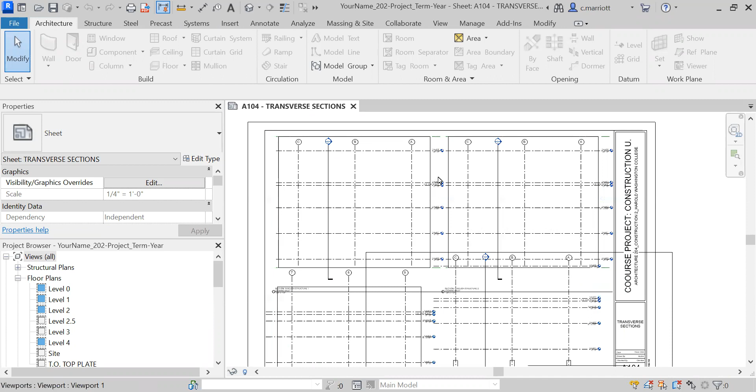So for this process, we're going to be working back and forth between the details and this sheet. There's some things you can do to make things more orderly. I'll be turning off some of these detailed datums, cropping some of the views, and making some alignments between the details.

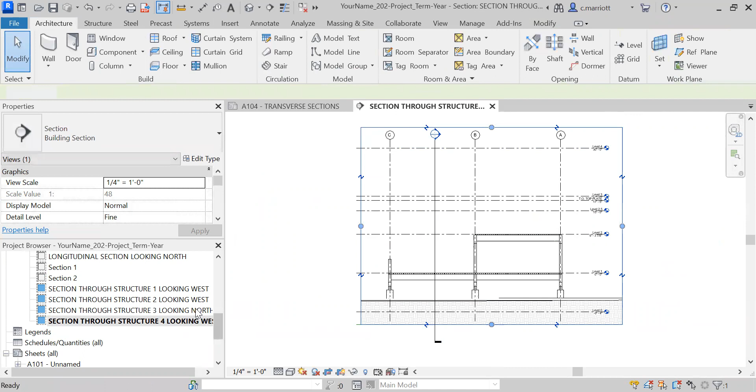The first thing I want to focus on is this section detail in the lower right, for section 4. I'm going to go to that view. As you can see, the crop window is quite large here, and I don't need to show this much content, so I'm going to pull these in just so they don't overlap so much with the other drawings. And I'll go back to the transverse section drawing.

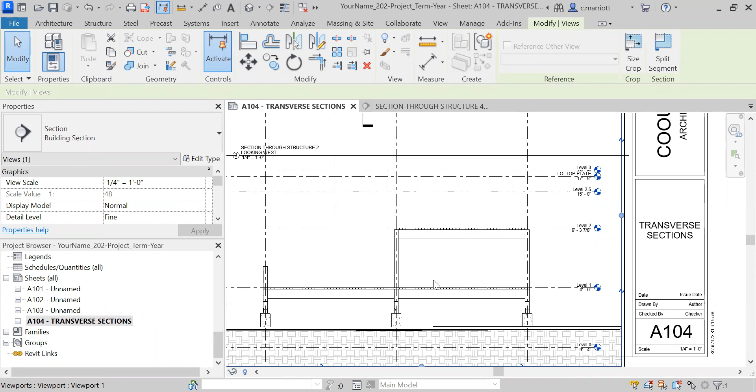Okay, so we still have a number of things we can do. For one thing, these datums don't really have relevance to this particular detail, since we have only a one-story structure. So I can begin to pull this in a little bit. I'll go back to structure 4, and I will pull this detail in, maybe just below level 2.5.

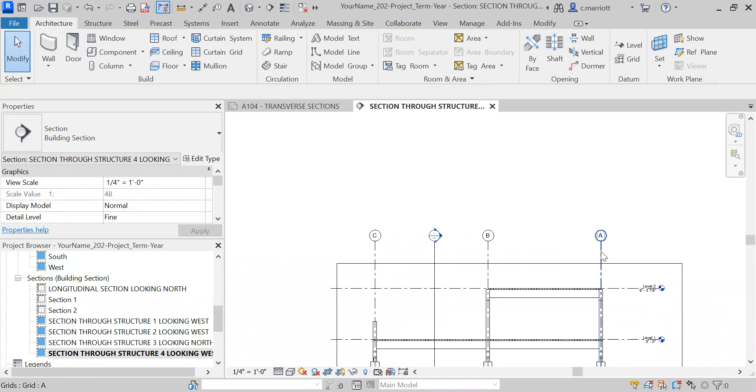I can click on these column bubbles and pull them in even a little more. I want to leave a little space on top for notes and other call-out bubbles, but generally I can condense this one quite a bit, and pull this in a little more on this side as well. All right, let's go back.

You'll find you have to go back and forth between the sheet and the details until you get things fitting a little bit better.

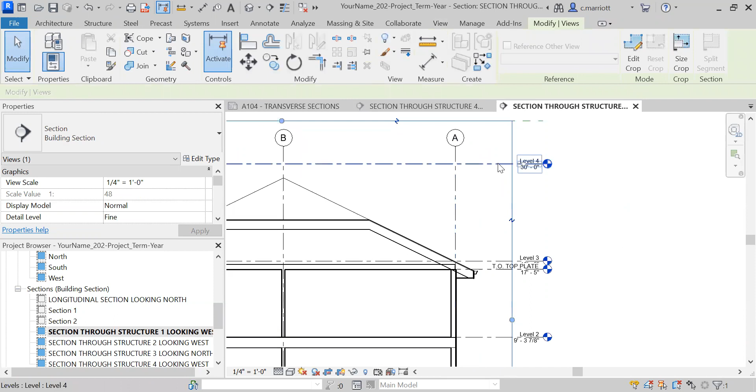Now I'm also going to go to the section through structure 1. One thing I don't need for this section is this datum to appear, so I'm going to hide this element in my view. And this one right here, level number 3, isn't really relevant, so I'll do the same thing.

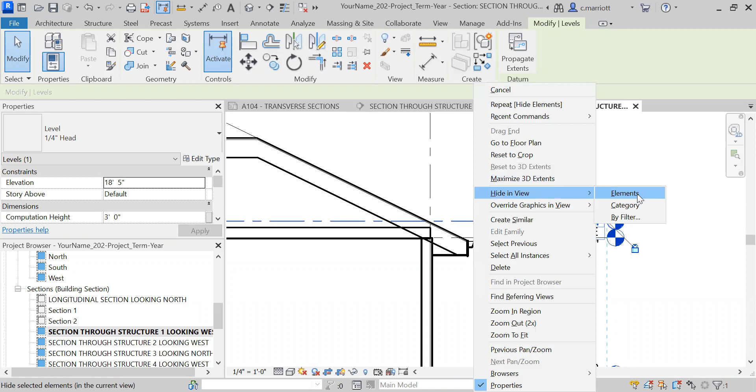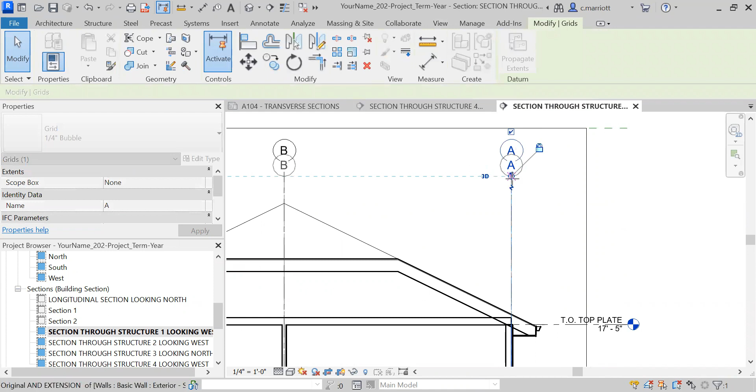Hide in view elements. I do want the top plate, level 2, level 1, and level 0. I might rename those at some point, but for the time being I want to keep those. I can also pull this down a little bit. I'd suggest you leave a little space at the top of the ridge.

And you can also take your section target here and pull that down. We want to roughly center it between these column bubbles in terms of height, so the center line of that circle. Okay, now let's go back to the sheet.

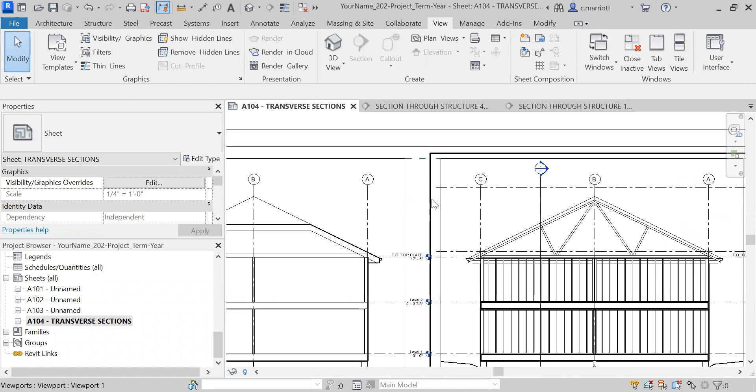This is going to allow us to move this up a little bit. I'll do the same thing with this view, which is the section through structure 2. Hide in view, same thing with this level 3. And again, these datums can remain.

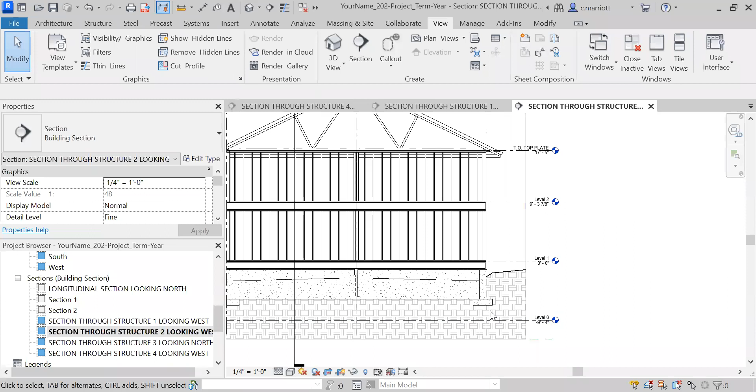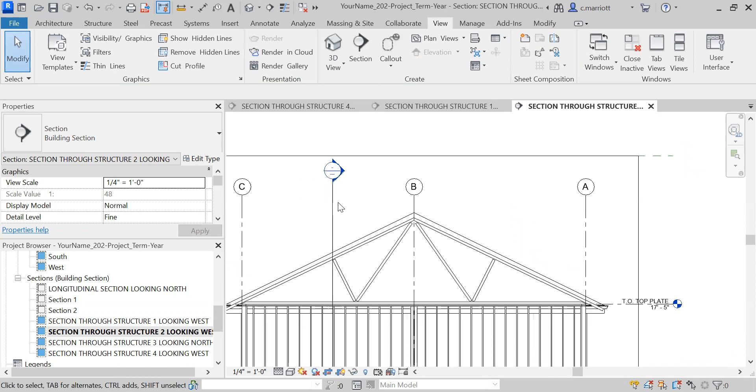This one here is a reference to structure 1, and we will probably need to add another datum for the crawl space to show maybe the top of footing, as a reference for someone who was to build the project. So this one is probably about the same height as on my other drawing. For the section target, I can pull that down a little bit. Let's take a look at how those relate to one another.

I still have my crop window showing, which may also be causing some visual clutter, but eventually that will be turned off. One thing I'll start to do, at least with these two sections, is make use of the datum since it's running across and serving the same reference. I'm going to try to make alignments across the page, so I'll only need the ones over here on the right.

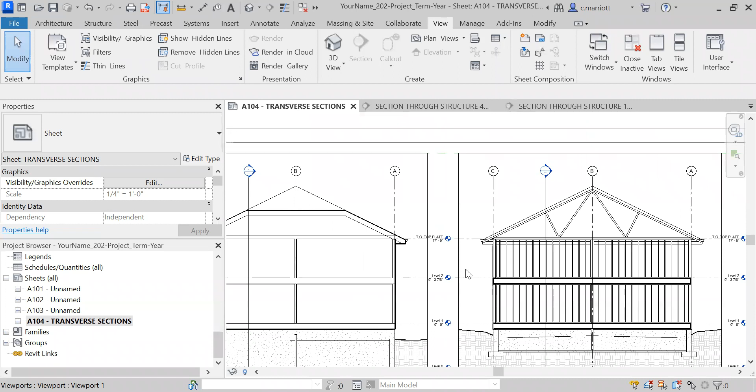Another thing I can see is that some of the details from the other structures are appearing in the view, and it's causing some confusion. So for this particular section, I don't have a gutter in the fascia.

So I can go to my longitudinal section looking north, click on these, and basically you can see it's showing this much within the view. I don't need to show that. I'm going to pull these in so they're inside the perimeter wall here.

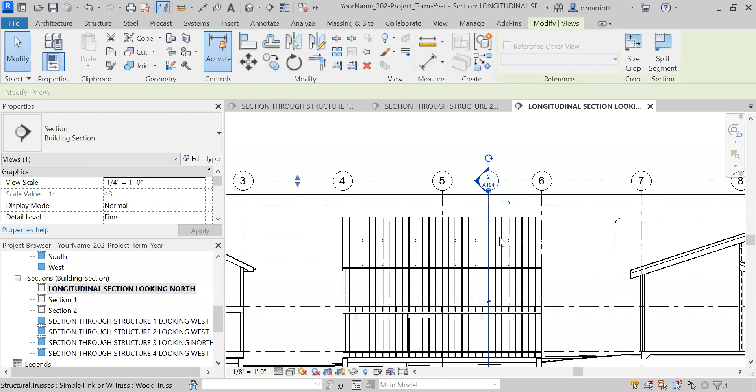Sometimes you'll want to include the information in the perimeter wall within a section, but other times it just makes it confusing. You can't really tell what is in the near foreground and what's further back. So I'm going to pull these all in.

This one here, it's kind of clipped to the center line, and I want to get a little bit more in that view. So I'm going to pull that one back.

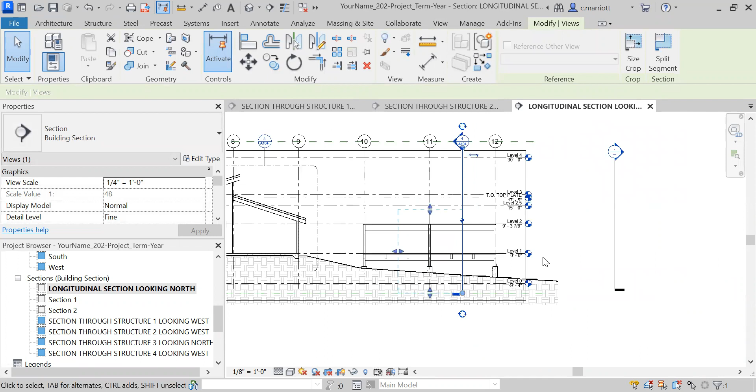So the section marker is the full height, like I had drawn before, but in the view, I pulled this down, and that's why this cropping window is much shorter.

Right now, if I go back to the section sheet, you can see now I'm not seeing some of that detail. So it will help me when I start to add notes and things like that.

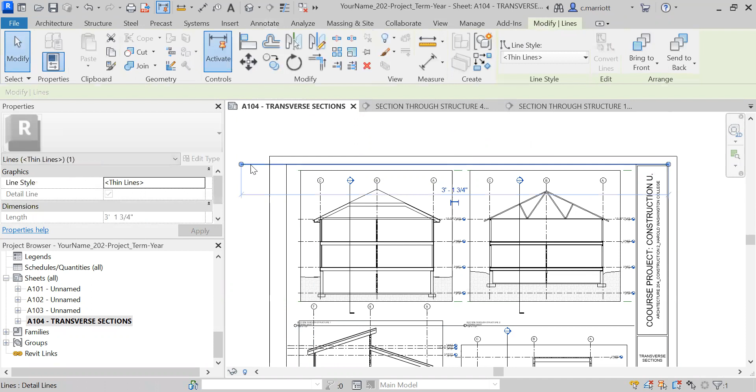Now I'm going to create a temporary line that I can use to align some of the things in these two views. So I'll go to annotate, detail line, and make a line at the top of the border in the title block, and then move it down. I want to give myself maybe half an inch of space.

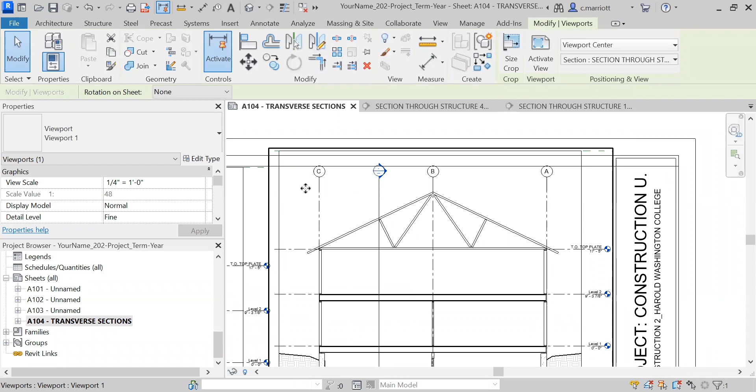Now what I can do is click on that view and use my arrow keys to bring it a little higher. I'll do the same with this view.

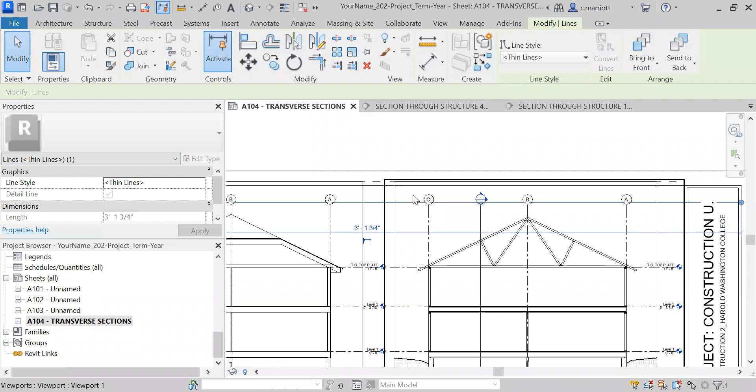Now really what I want to align, once I get half an inch of space above that, what I really want to do is align my datums. So I'm using the arrow keys, bringing this down. And as you can see, this datum here and this datum here are pretty much in alignment.

So that's good, and that will make it easier for me to use information on one drawing to apply to another drawing. Okay, so I can eliminate that one. I might need to make a new one in a little bit, but for now, let's leave that as it is.

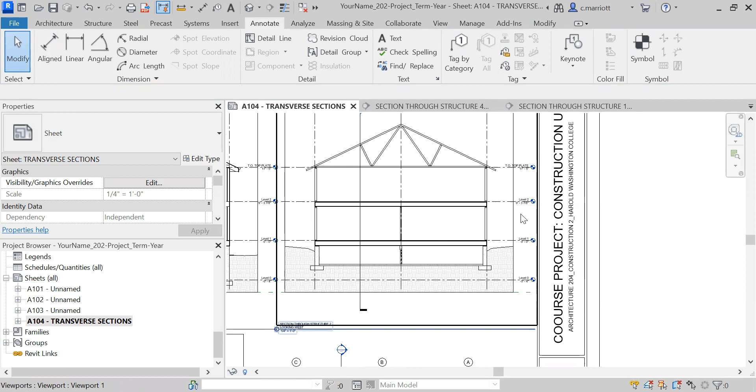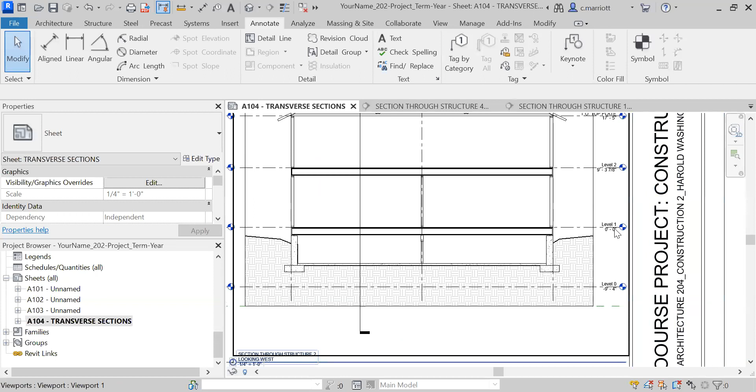Now for these notations here for the datums, top plate is fine, Level 1 is fine, Level 2 is fine. Level 0, maybe I want to call that top of slab. I might add a little bit more detail to some of these.

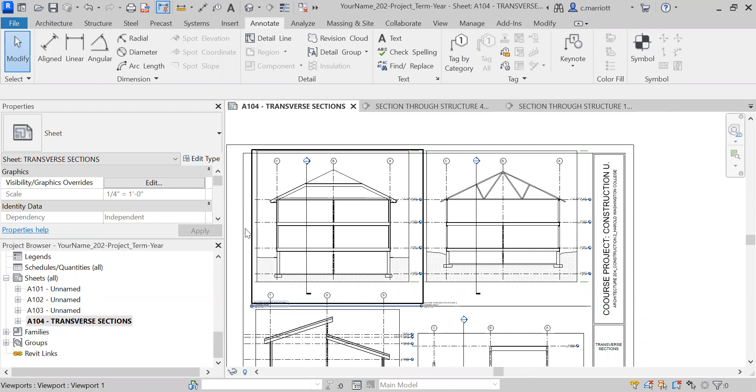Before I make any changes to the specific level names, the thing we'll be doing is adding some notes to a series of wall sections. Generally speaking, I like to put the notes on the left side. So we'll create a wall section, let's say right here, and we'll have a series of notes that identify the materials being used in the assembly.

I also like to have the datums, these level datums, appearing in that same line of text. So I'm going to go to the longitudinal section looking north. I'm going to click on the datum, one of the datums. Well, this one I'm not using, but just to give you an illustration of how this will change.

If you click on, so you've got to click there. Okay, so we've got a check mark over here, meaning that it will appear, but not on this side. I'm going to turn these on and turn these off. So I'll just go down the whole list and turn them on one side and off on the other.

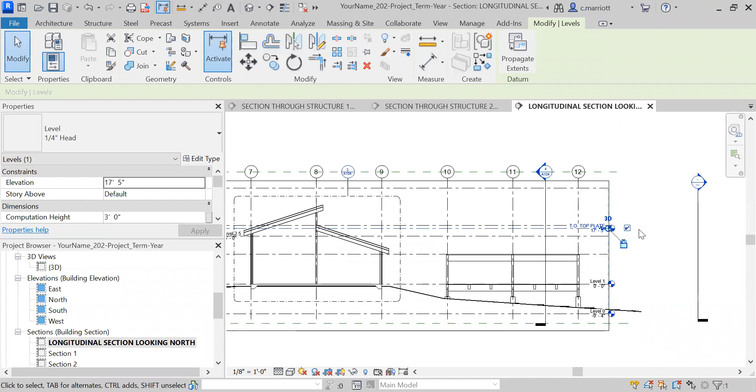There's one that's appearing here that I need to turn off and turn on.

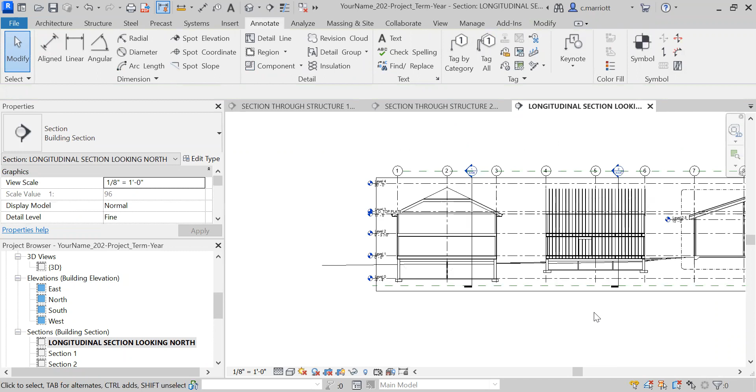I think that's all of them. Let me go back to the sheet. I think I'll have to reset these for all of the views - probably would have been better to do this first. So if I go to section 1, I'll repeat the same process.

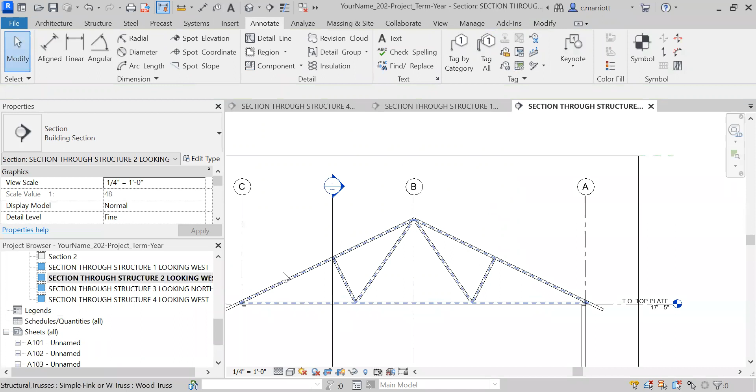This is where things can get a little bit tedious. I'm going to go through each one of these views and repeat this process. Okay, section 2 is done. Now let's go to section 3.

For some of these, again, I won't be making reference to them. I may create some new ones, but this one here, level 3, I'm going to hide. Oops, control - I didn't want to hide the category, I want to hide just the element. My top of plate refers to the other structures.

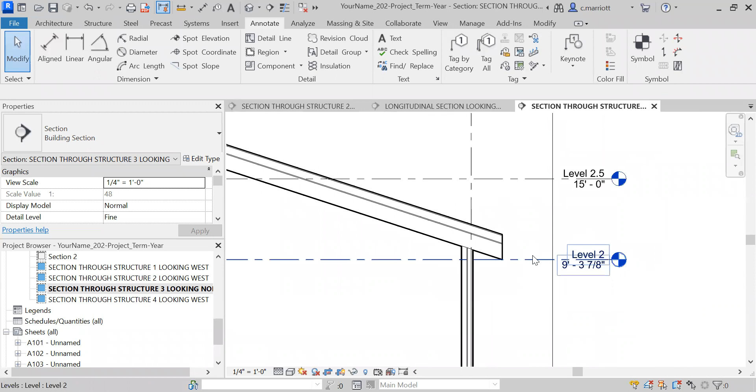I'm going to leave 2.5 as that had to do with this particular drawing, and we'll leave level 2, but I do need to flip them so that the reference is on the left. Okay, structure 4.

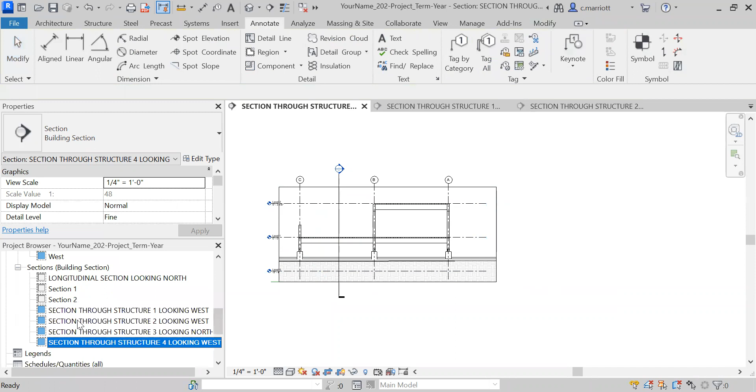Going back to the sheet. Okay, now everything has been moved over.

Okay, so I am going to change some of the text here because I just want to make sure I have enough room, and I want to make the corrections to these levels. So...

If I go to level 0 and rename it level - I'm going to put my caps back on. For now, yes, I'm going to change them to all the corresponding views. So let's see, did that change happen?

Yes, I'm going to go through all of these, and some of them I will change a second time. Now, sometimes you want to update the name everywhere, and sometimes you don't.

Let's see here. This will require another change - we're not going to call it 2.5 when we get to that, but rename level 3. And...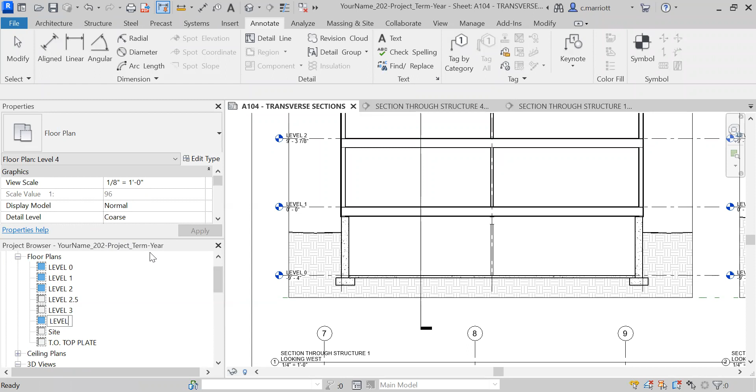Some of these will not become references, so you can change them or probably end up leaving them. Level 4. Yes, okay, got all those changed.

Now I'm going to go to structure number 1, and I'm going to click on this and call it top of subfloor.

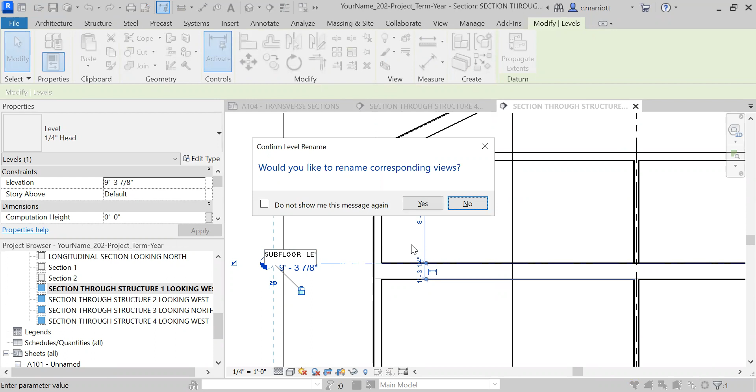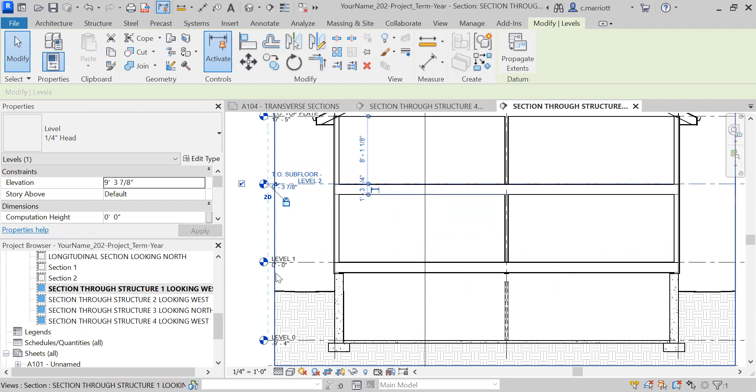And a little hyphen there. I am going to say yes for this. Fix this - this should not be a 0, but an O. Okay, same thing for this level number 1.

I'm going to call this one top of subfloor, now that's opposed to saying top of finished floor. I like to do top of subfloor because that's going to remain consistent. But if I have a wood floor in one room and let's say a marble tile in another, the finished floor height will vary. So it's better to use a datum that's going to be consistent.

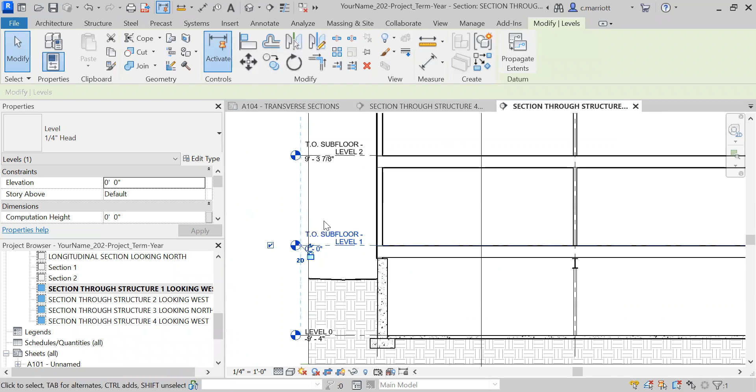Now that I have these changed, I feel like it's a little bit tight in here between the text and the building - you can see right here, there's some overlap. So I'm going to click on that datum and pull this out so there's a little bit more breathing room between them.

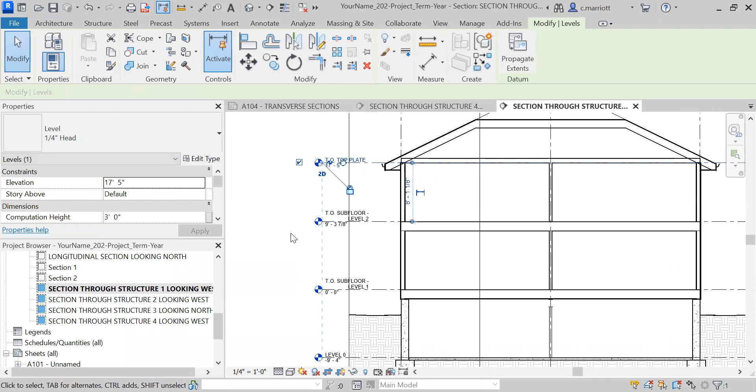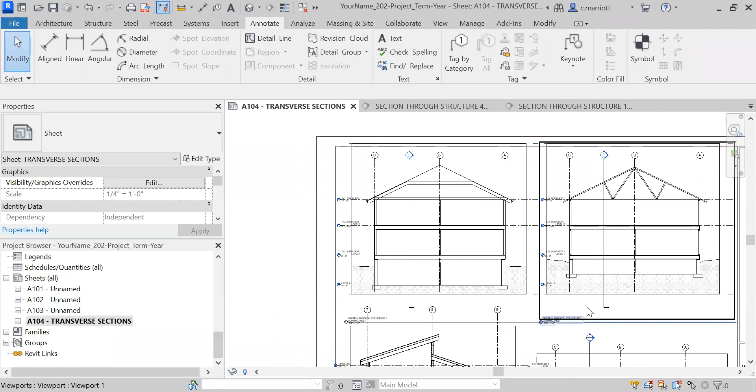Okay, and for my crop window, let's see how it looks on the sheet. Okay, I might need to make some adjustments for some of the other ones, but what I'm going to start with right now is creating a gap between the top of the column bubbles and these datums. I'm going to do a similar thing vertically.

I'm going to draw a vertical line here. I'm going to move it over a half inch so I have a little bit of space between the view and the title border, and I will move these over a little bit, about right there.

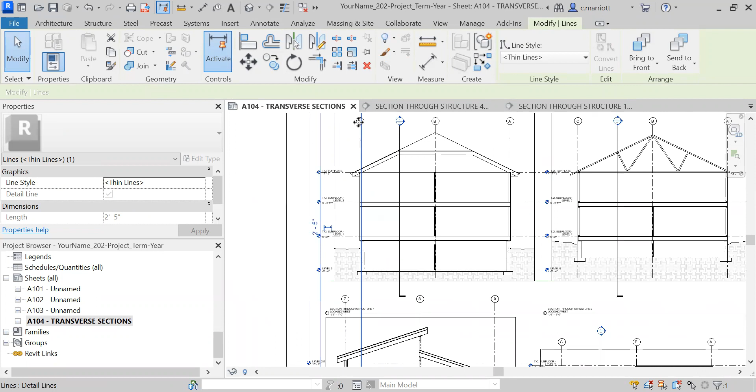Okay, now what I'll also be doing with these is moving that line that I created. Even though this is referencing column C, and down here is column 7, I still want to bring some consistency to the relationship of the drawings on this page.

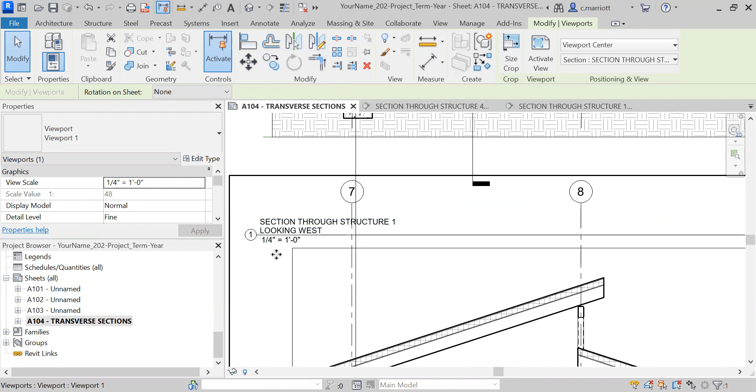Well, I'm going to zoom in a little bit more and try to fine-tune this. Bring that a little bit closer to my reference line, and I'll do the same thing with this one, so that they have a similar relationship.

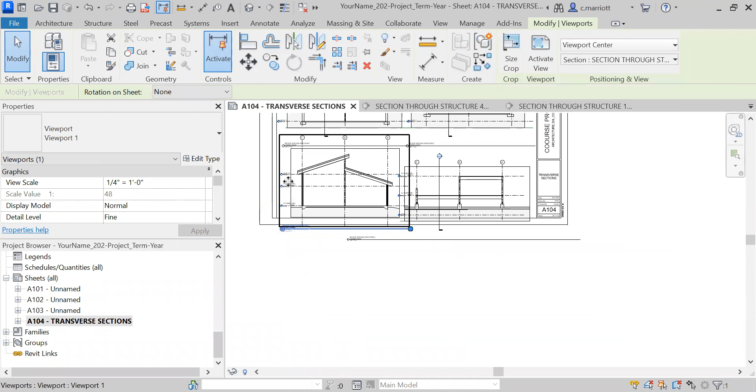And I'll also bring this one back to where I had it, and I will repeat the process for aligning the datums. Yeah, these need to be brought over a little bit more. If I double click in this view, I can move them over without going to the sheet.

See if we can't - there we go. If you pull by these circles, you can begin to drag them a little bit better. Okay, that one did not let me do it.

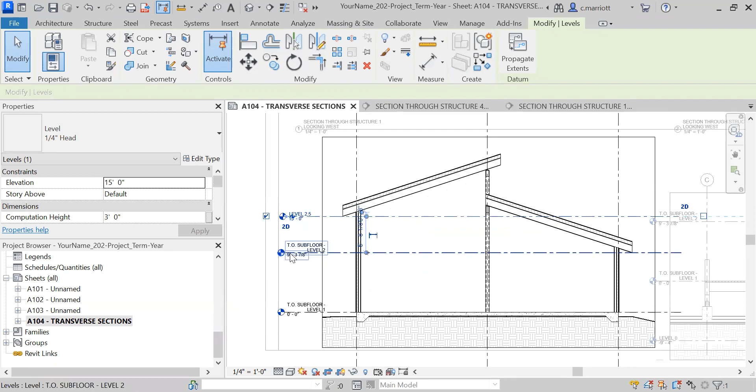I have a little bit of space in here, so I'm going to try to make these a little bit more consistent. Looks like I'm having to do this all the time.

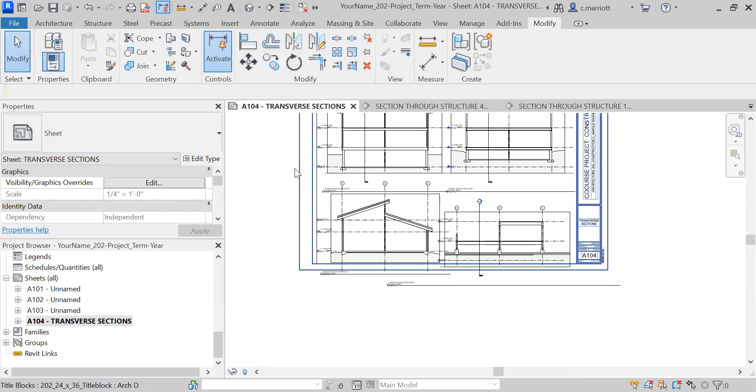There we go. Okay, now I'm going to double click outside of that detail, so now I'm in the sheet, and I will adjust the crop window to expand the topography to align with this edge right here.

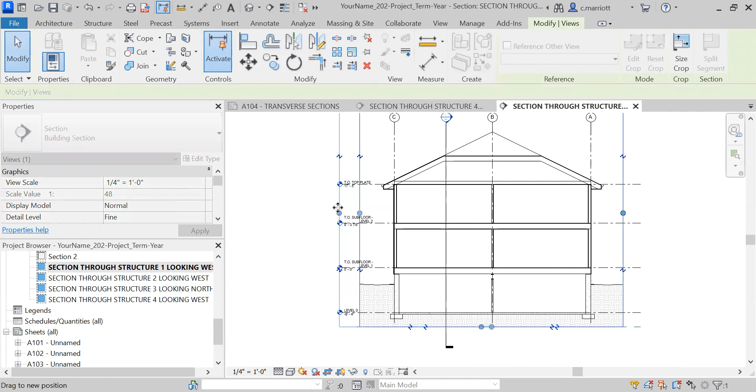Okay, so let's go to section number 1. Save your project if not in a while, bring this over here.

One thing that I noticed: you can see that the grade is kind of dropping into my structure. I'm going to need to play around with the contours a little bit at some point so I can get the grade to slope away from the building. We'll come back to that at a later time.

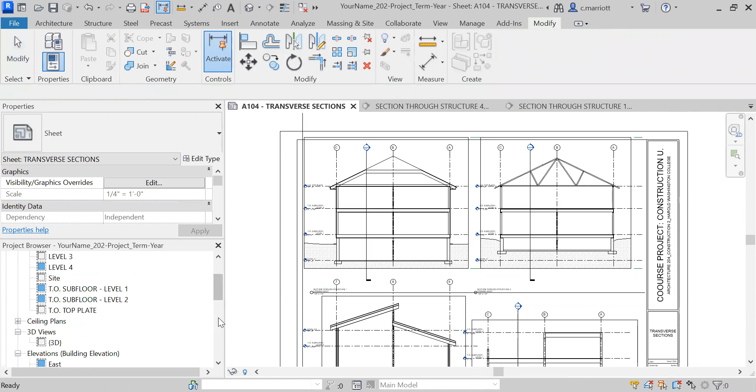I'm also going to take these and pull them back to the edge of the crop window. All right, so already things are starting to sort of fit a little bit better on the sheet. If I click on this view, let's go to that view and let's turn off the crop window, the crop region, and go back and get a better sense of how things will actually start to look.

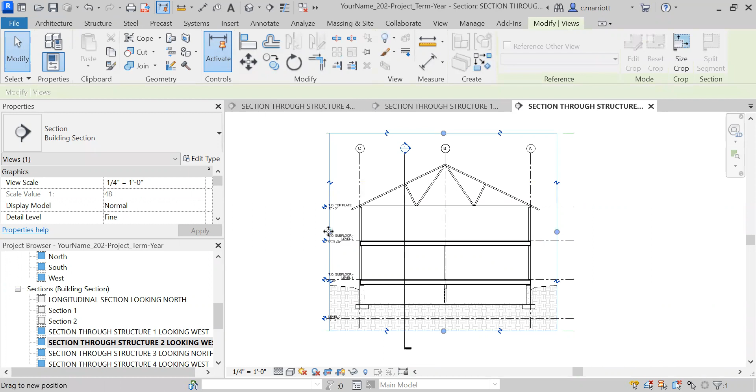I'm going to do a little bit more work on this section right here - section 2. Click on that crop region and drag it over so we have a similar relationship of the datums to the topography. I'll click on this and bring this in.

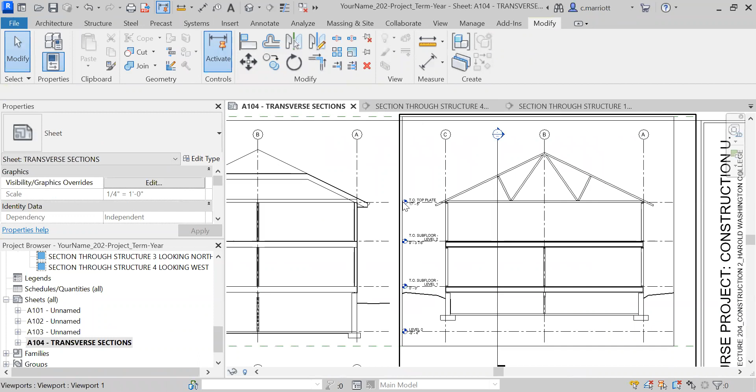Now for this side, as I mentioned, sometimes you can eliminate information if it's kind of redundant. By redundant, I mean I already have a datum over here and it's labeled. You don't need to include this one, so long as it's clear that the line is carrying across at the same height. So what I can do is go to structure number 2, and I can turn it off.

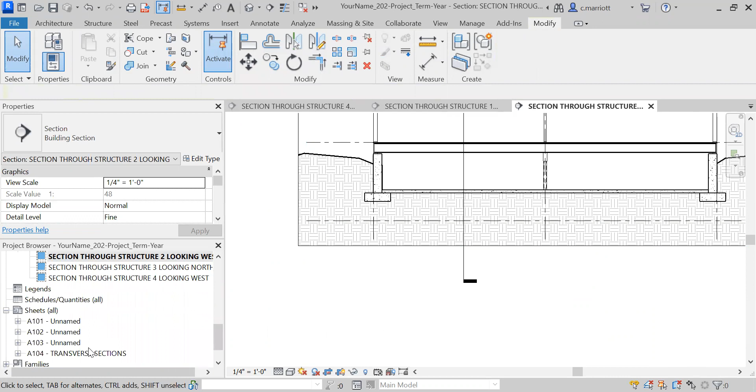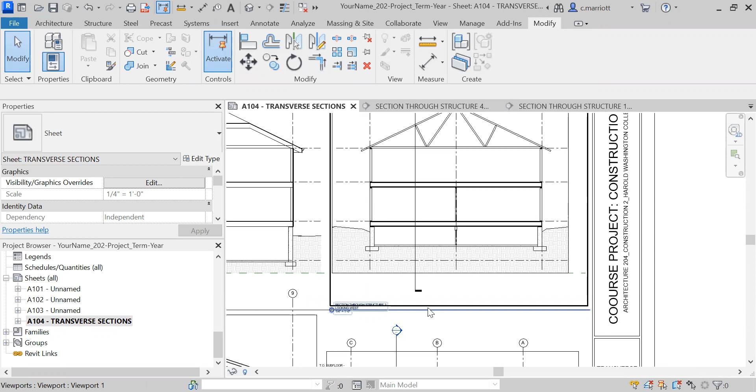Okay, now see, I have the same issue here with the contours. This is going to create a problem with water getting trapped basically in here and migrating its way down the foundation wall and possibly into the structure. So we'll fix that. Okay, if I go to section number 2 and I turn off the crop window.

Okay, I can see that things are looking pretty good at the moment. We will need to bring these titles up a little bit higher, but we'll work on these 2 sections to get them kind of cleaned up too before we do that.

Okay, now I'm going to go to section number 3, and I'll start to kind of bring it in a little closer. I'm going to bring this column bubble down here.

I'm going to bring the crop region over to align those level datums. Maybe bring this up just a little bit to bring these levels over to the crop region.

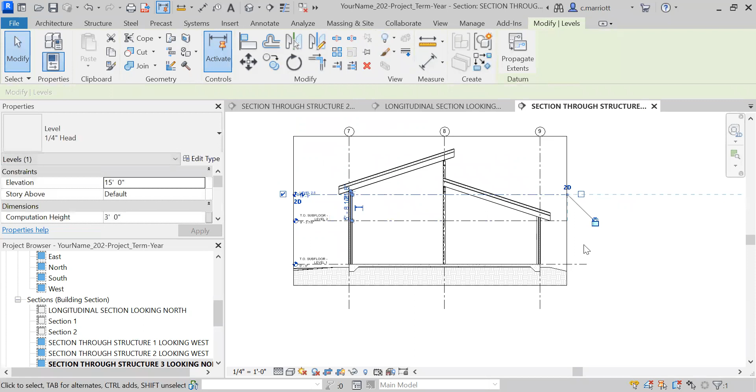Okay, why didn't it bring all of them? Not sure. Okay, let's take a look at the sheet. Going back to section 3, I'm going to turn off the crop window.

Okay, and now I'll start working a little bit on structure number 4. As I had done with these column lines, I'm going to try to align them vertically here. Go to annotate, create another detail line, bring this down. Take my section view, use the arrow keys to sort of bring them closer. Let's see where.

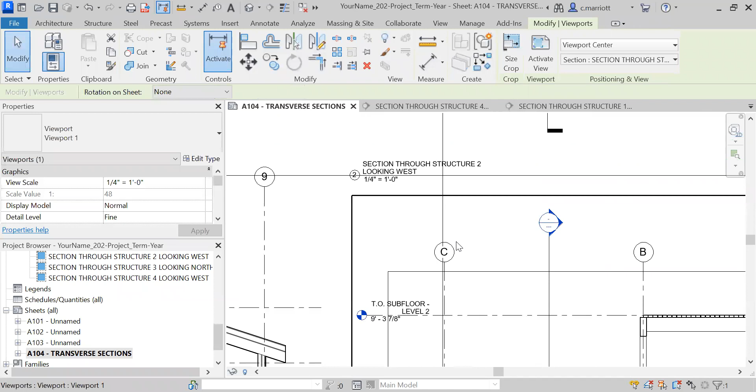We have to zoom in order to - there we go - and get them pretty close. Okay.

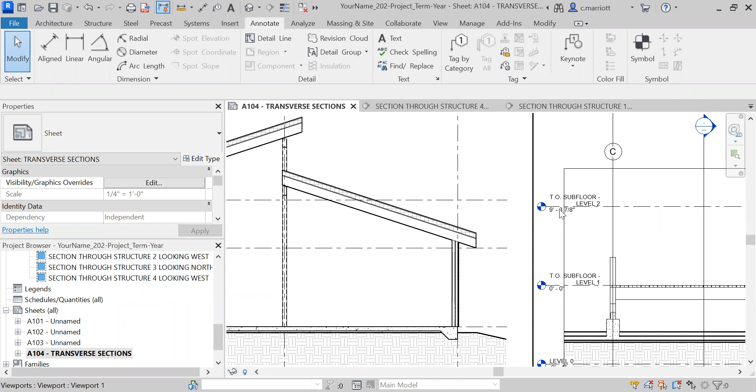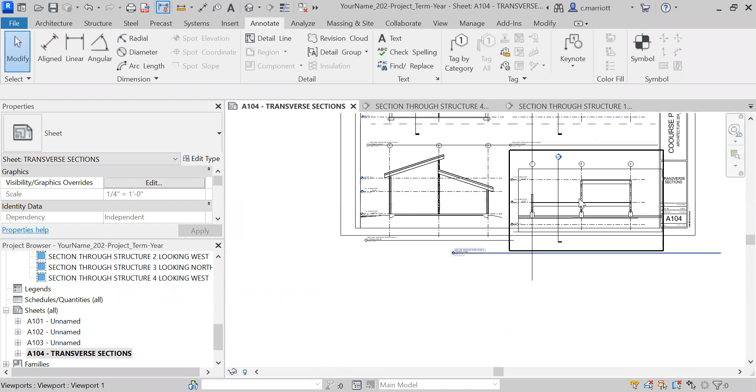Now for this one, in terms of which ones will track across, I'm going to need to keep the level 2 top of subfloor and level 1 top of subfloor. We may need to move this or change this a little bit. Right now the piers are going down to that level, but we may make some adjustments as we get into more detail with those. So to look for a common place to align something here - we may not have the ability to have an alignment like we have up here because we're kind of working with some different heights in this location.

So I'm actually going to move this one up a little bit, and before I kind of finalize that, I think I'll start to get some of these titles in their final locations. So I'm going to create another detail line for this, and I'll use this lower level here, and then I will move these down.

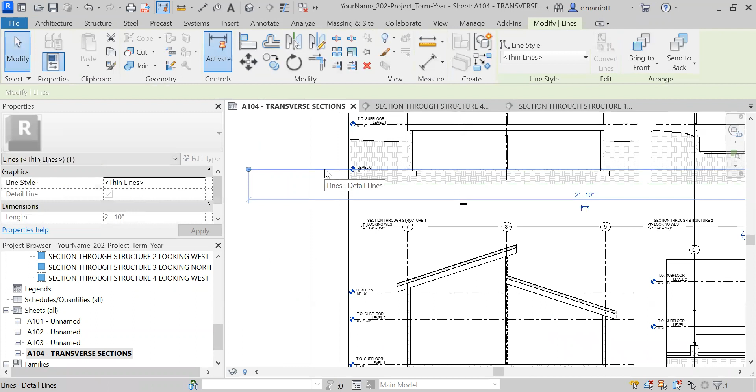We'll try that location and see if that gives us enough room to get everything we need. Now, moving the titles, there's a couple of things that you need to do for that.

If I want to move this title here, section through structure 1 looking west, I'm going to click on the title or on the view itself. And if I try to move it, it's going to move the whole view, which I don't want to do.

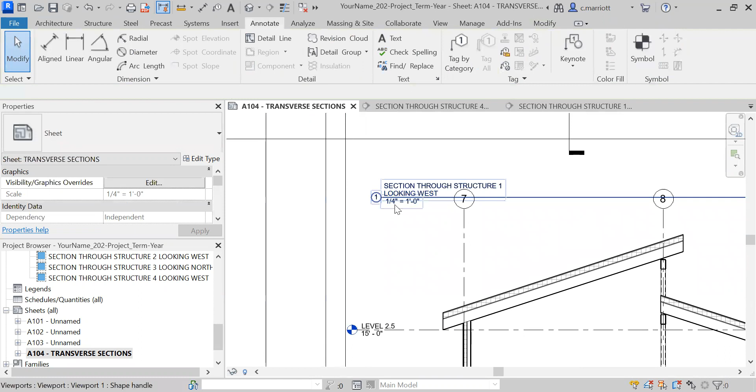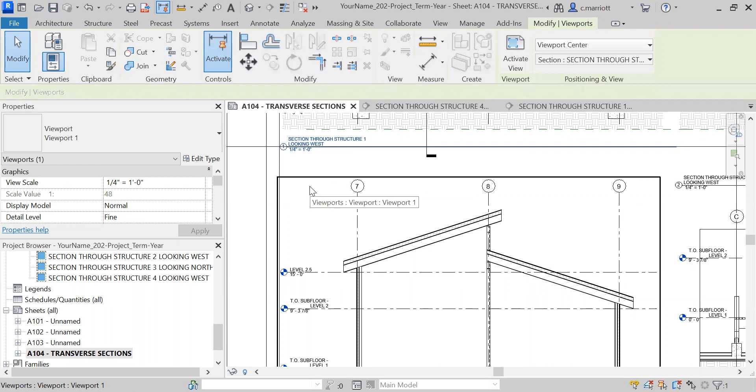To move the text, instead of clicking on the view, you need to click on the title itself and bring it up. Now I'm going to create the same alignment that I have with my datums here, try to bring those into the same point, about right there.

Okay, and you can see that my tail here is dropping below this, which I don't want. So I'm going to go up to structure 1 and bring this up higher. Maybe bring it down a little bit so it's slightly below the topography.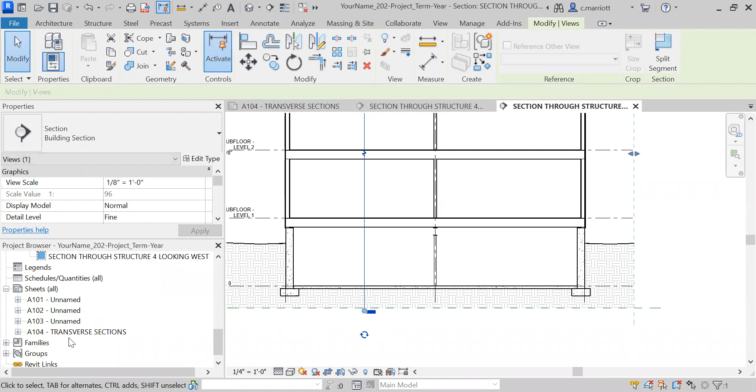Now, to move the end of the tail, or the right end of the detail line, the title line, I'm just going to drag it and try to align it with my crop window here.

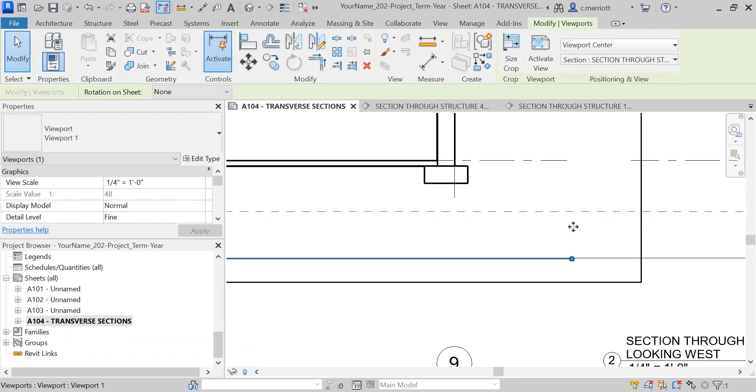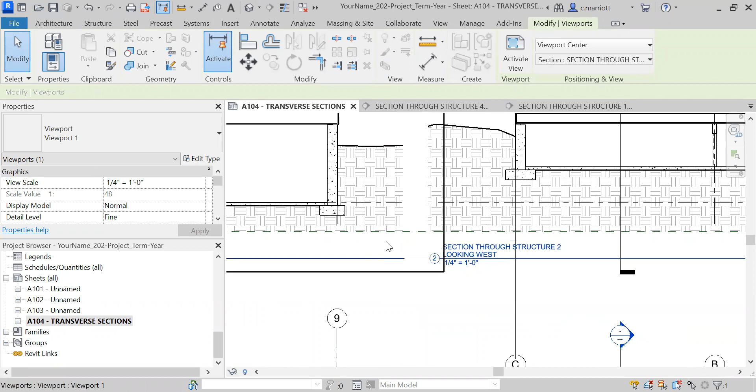Same thing with this title down here, I'll click on it and use my arrow keys to bring it up. I'll shift it over so the left edge of the bubble, the column, or the detail title number bubble aligns there.

And with adjusting this line, you actually click on the view and bring it in.

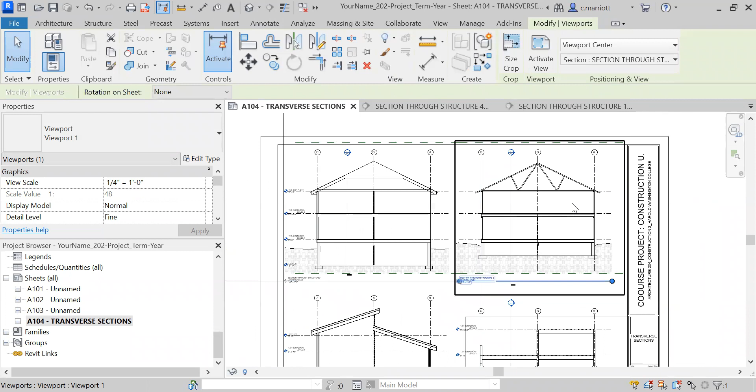Okay, now I have a pretty generous amount of space over here on the right, and I could space these out a little bit more. If I click on this one and this one at the same time, see if I can hit control, yeah, I can move them over together so that I've got a consistent dimension between the details and the border.

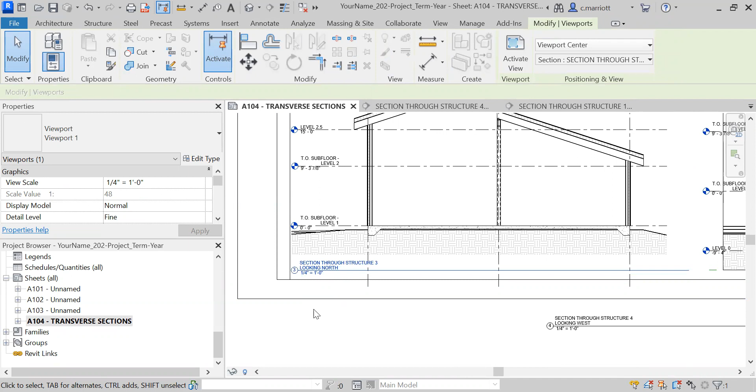Okay, so I can erase this detail line, and now what I'm going to do is move this one up just a little bit so I can get my title for this view into the title border area. So I'm going to click on that, and I'm going to get those alignments going, make sure that there's a little bit of space between the title border. And that one's looking pretty good.

You can see that these column lines are dropping below the title, and I want to correct that. So I'm going to go to structure 3 and bring them up just so they're a little bit below my topography.

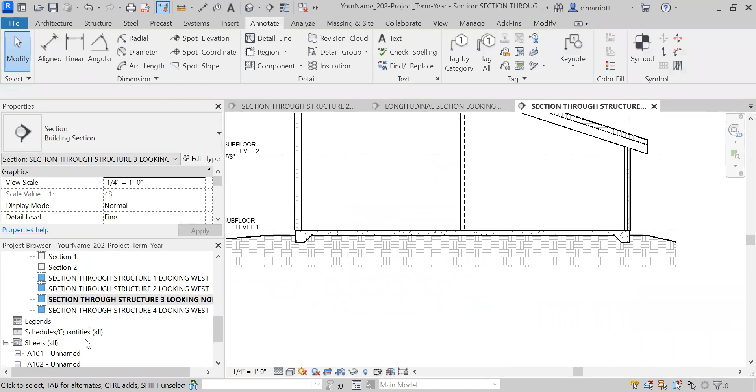The last one to clean up is this one right here, so I can bring that up a little higher. I'm going to try to align my crop window, this right here, so the topography runs consistently across there.

And then I'm going to start to move things around a little bit more. I'll bring the crop window over so it aligns here. So let's go to structure 4. Click here, bring this over, bring this up.

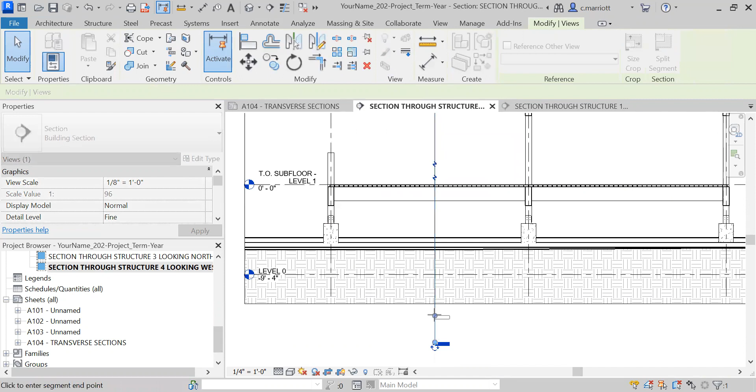I don't remember what was happening over here on the right. I think I can probably bring that crop view in. Yeah, so it's kind of overlapping my title border, I'm going to fix that. So I'm going to click here and drag that.

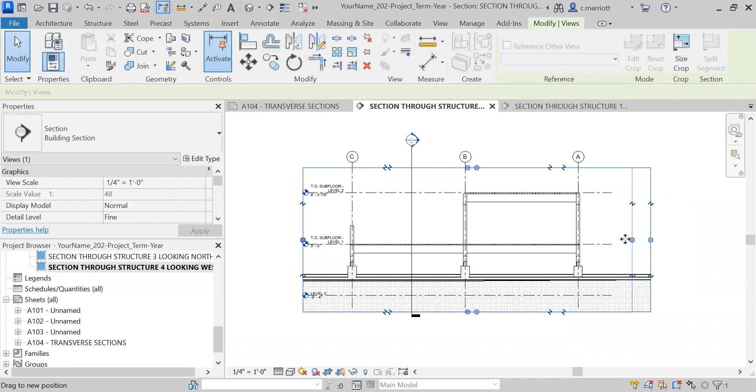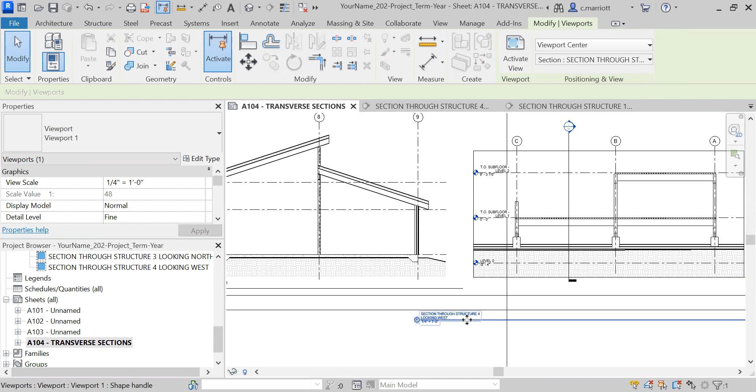Try to align those two. Pretty good. And I'll click on the title and use my arrow keys to bring that into place. It's good.

Remember to drag the tail in. You need to click on the view and then pull this in.

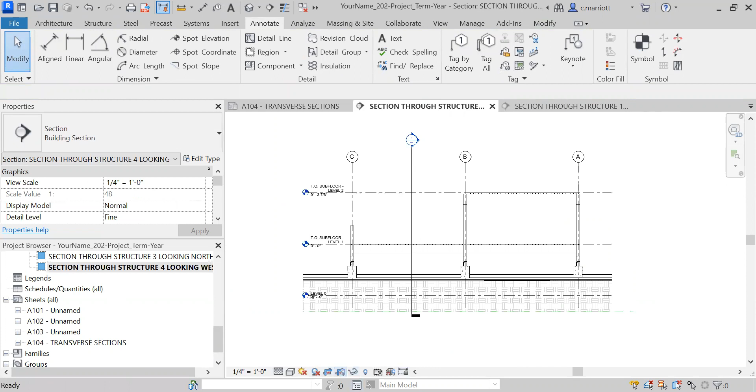Okay, I can eliminate this detail line and this detail line can come out. And I'll go to structure 4 and I'll turn off the cropping window. Some of these settings you can adjust directly from the page, but...

All right, so basically that is what I will be showing on this sheet, and we may be adding some more content, but basically the organization of the sheet is pretty well set.